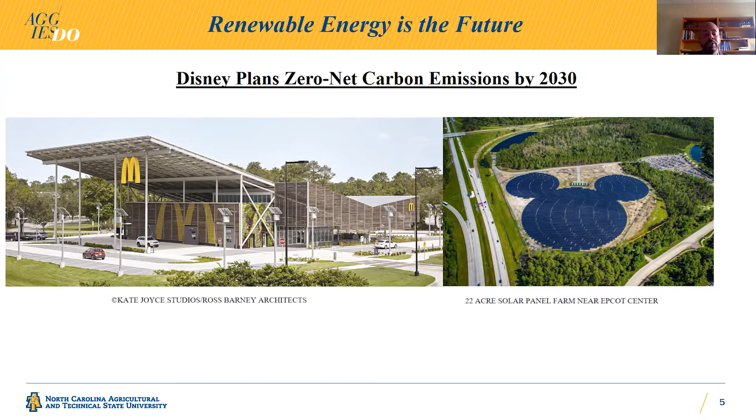And here is this, I just really like this picture. It's a solar power plant that's in the shape of, of course, Mickey Mouse, down in Disney World. So this is a global effort that's not just small scale. There are larger scale corporations that are interested in looking at renewable energy sources, okay? And so in engaging students, we wanted to explore what other types of energy sources we can use that are renewable forms.

And so they explored solar, they explored wind, geothermal, but they also explored ocean wave energy. And in that, we found out some very unique, interesting, and very promising characteristics about it.

And so now I'm going to pose my poll question to you, if you have that available. It's almost a rehash of what George had, so make sure you guys are paying attention here. Current estimates show that wave energy off the coast of the US can potentially meet blank percent of total US energy demand. Go ahead and put that in.

This is what I like to do to my students. I ask them a question that was almost already asked to see if everyone was paying attention. But I'll keep moving on, and we'll come back to it, and I'll give the answer in the next slide. All right. So it looks like we have a lot of people in 42. So moving to the next slide.

So the Department of Energy estimates that 2.64 trillion kilowatt hours, which is equivalent to more than 64% of all US electricity consumption, can be met by wave power just off the coast of the United States. And really, if we're able to combine all of the ocean energy resources in the whole world, it's more beneficial than wind and solar combined.

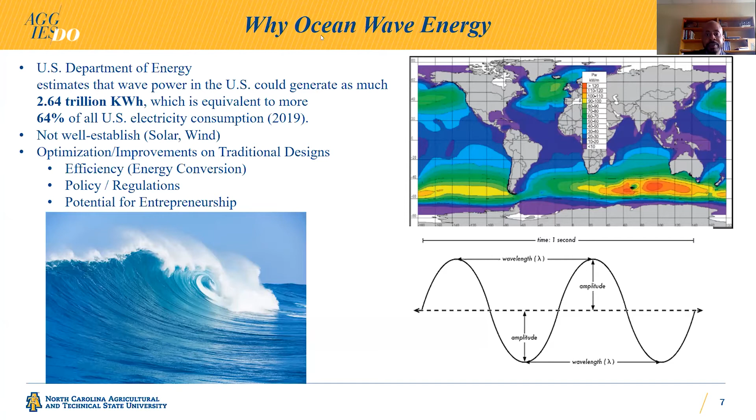One of the things that we do here at A&T is that we like to compete, and we also like to disseminate our research. And luckily for the North Carolina Renewable Ocean Energy Program, there's a yearly symposium in which students get to travel and network and interact with people such as Lindsay and George and Mike, and bounce ideas off of each other yearly. And the key point that really got a lot of students interested is it's in the Outer Banks of North Carolina. We get to spend a couple of days out there.

So we have female engineers, male engineers. We have graduate students mixed in with undergraduate students. We also have 3 international students. I have a student from Ghana, Bangladesh, and China. So when we came together and met throughout the course of the year, we were able to bounce a lot of great ideas, and different backgrounds and diverse thoughts were able to come in, and we were able to be very successful in that first year.

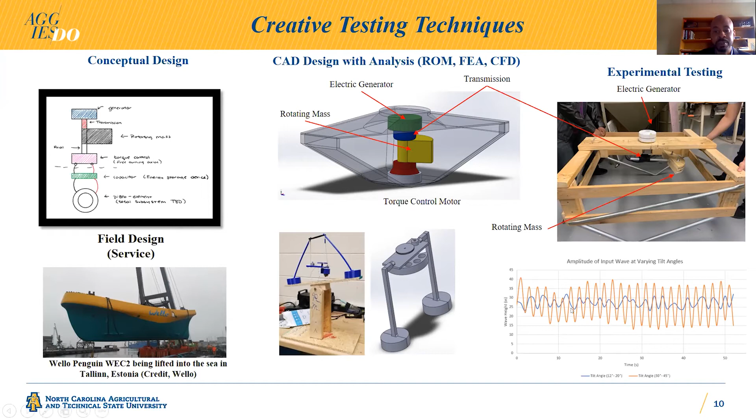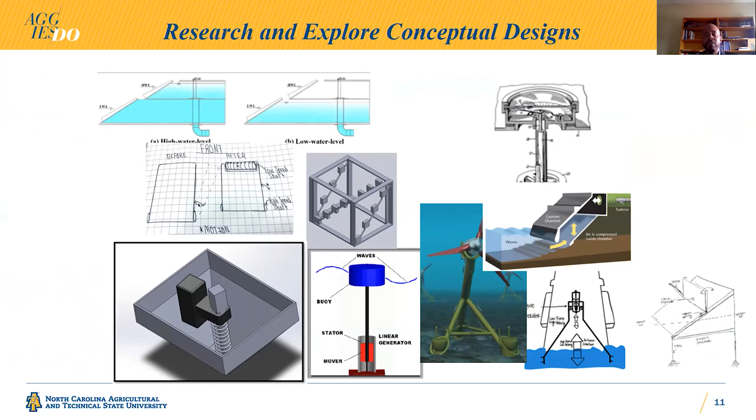So moving into the second year, and some of the successes that we had in that first year, the students wanted to explore all different types of ideas for ocean wave energy device building. So we looked at electromagnetic buoys, point absorbers. We looked at overtopping devices, even this device right here, which is a cascading waterfall effect in which gravity would generate kinetic energy from ocean water movement. We looked at underwater turbines. But finally, what we settled on is known as an oscillating water column.

So an oscillating water column acts by, as waves enter a chamber here, in which a pocket of air is centered just above the waves, it produces a piston-like motion as the waves come in and out. And that piston-like motion draws air into a turbine, which then spins and generates electricity.

Now, we chose this device for a number of reasons. One is that me being an aerospace engineer, I knew how to work with air and turbines, et cetera. Secondly, it's one of the most studied devices out there right now. So there's a lot of background information that we could use to draw ideas from, and that students could use to do their background lit search, as well as see if we can improve upon current designs.

The first thing that we saw when we looked at this design is, hey, from an aerodynamic standpoint, this chamber is very square-like. We have this sudden loss and change of area in terms of pressure loss that we could make more streamlined. So we saw a lot of opportunities to improve upon the current designs of oscillating water columns.

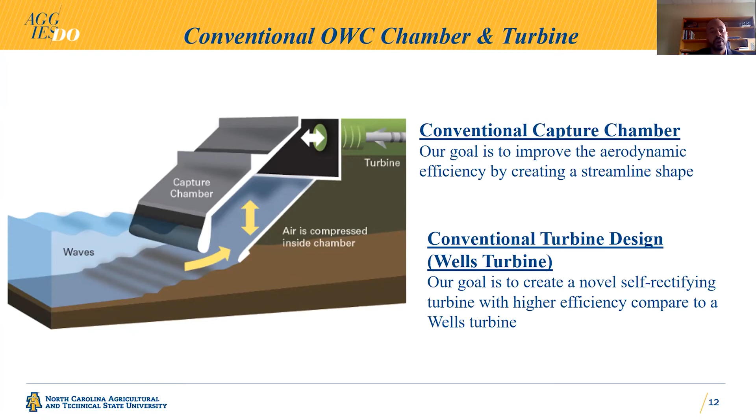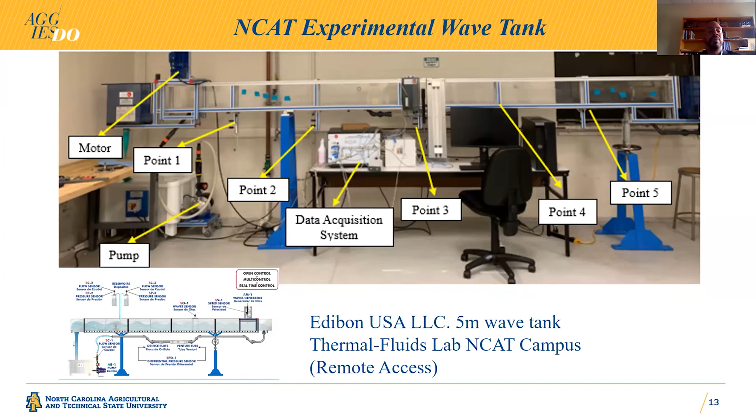Also, CSI, which is located on the coast of North Carolina, has this very large scale water tank that we didn't know of the first year, but luckily George introduced us to it when we went up there for the symposium and gave us a lot of free will to use this device at any time we needed it. So we were able to build even larger scale devices. So this is the second year team. We were able to build a large scale novel oscillating water column, as we like to call it, and test it in the CSI Wave Tank.

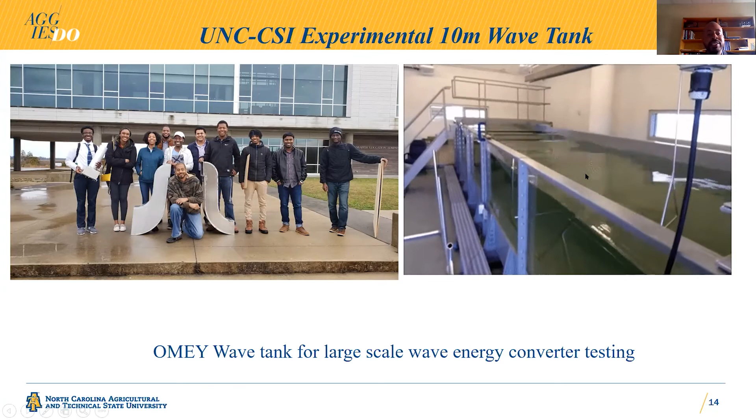And here you can see some pictures of that. So this is the oscillating water column. This is one of my favorite students, Murphy. And these are some of the students getting ready to test our oscillating water column in the CSI Wave Tank. For this first year, we had the chamber here. We had a turbine that's located inside of here. And we were actually able to show that once we turned it on, we were able to monitor the RPMs of the turbine using a tachometer.

This year, going into our third year, what we're moving to is actually connecting the generator to the turbine device, as well as a multimeter to see exactly how much electricity we're generating from our devices. So it's a progression each year to show continuous progress in terms of our research and development of oscillating water columns.

Just as a caveat, this test that we did was conducted last year around February 24th. So it was right before COVID hit, and we got in there the week before the whole university shut down. So we were very luckily able to get in there at that time and test.

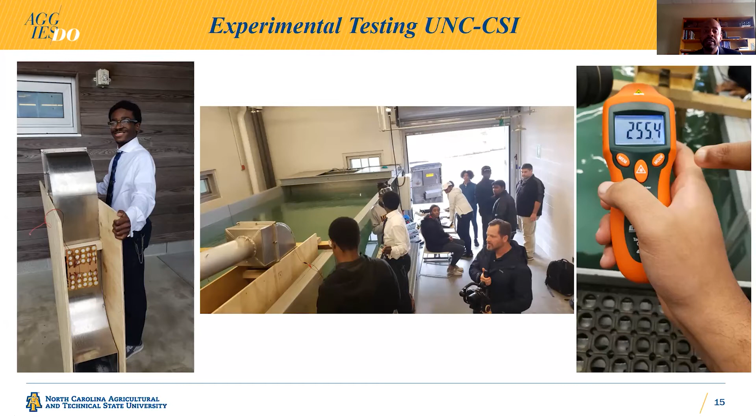Now, when the university shut down, we began to focus on using computational methods to assess our oscillating water columns. Doing things computationally, no one has to be together. We can log in remotely. So we were able to use a code known as ANSYS, which is a commercially available code, to test out different changes in geometry to do rapid assessment of these devices.

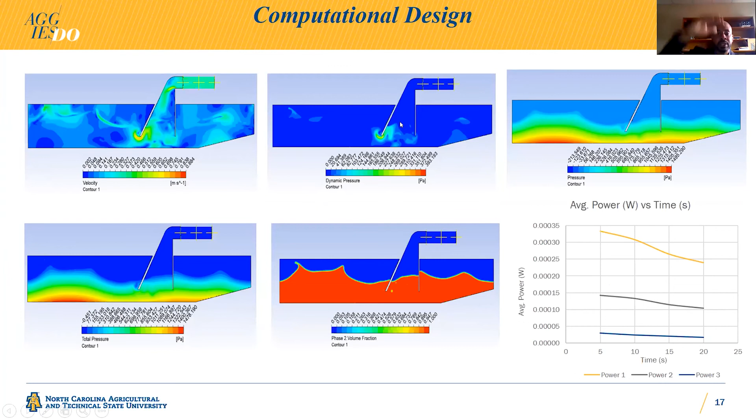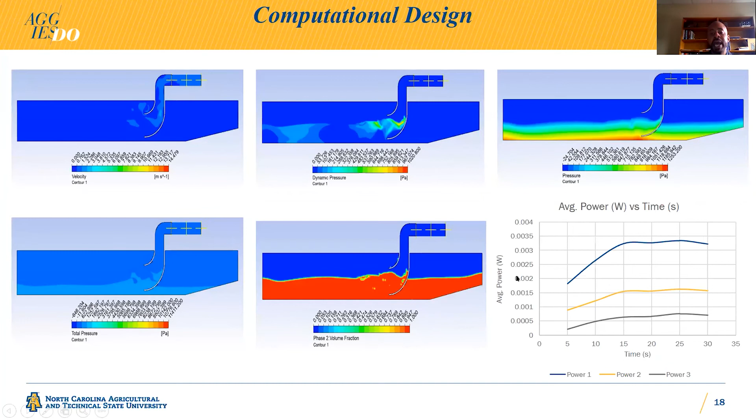So our first device, we started off with this kind of rectangular device, and we're able to measure, say, our average output versus time at different locations throughout the geometry. So what we would do is we would simply make small changes to the device. We would raise it, lower it, as well as make changes. Here you can see the kind of curved duct, or this more streamlined shape. We were able to actually produce an order of magnitude higher power compared to conventional designs.

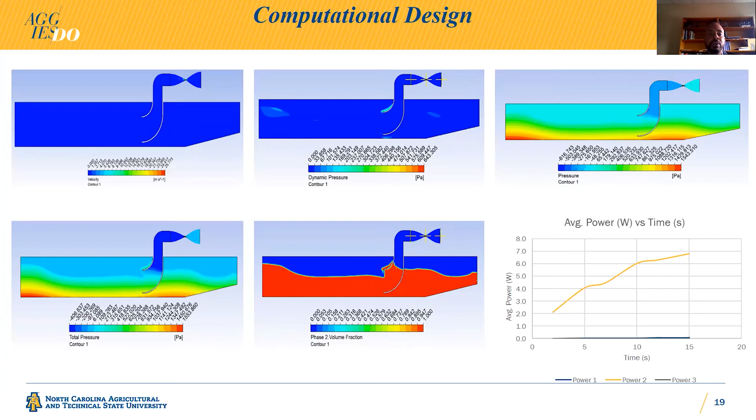And this kind of opens up a design space to us where we can explore many different ideas without having to deal with some of the COVID restrictions. So a lot of our efforts this year have been focused on computational design. Now that the university is beginning to open back up a little bit more, we're able to do more experimental testing, and hopefully we're able to get back to CSI and do large scale testing later on this semester.

A second piece of this, and where we plan on moving to in the future, is doing what's known as transdisciplinary education. So everyone's heard of multidisciplinary education, where we do mechanical, physics, electrical, computer science. But another piece that's missing, particularly when we start talking about ocean renewable energy, is that it's a global effort.

Last year, I teamed up with a tour group known as EF Tours, an educational tour group. We actually took a trip to Spain and Portugal for a week last year, and we were able to tour an oscillating water column facility located on the northern coast of Spain in the Basque region. And it's one of the very few oscillating water column facilities in the world. So being able to travel there and actually visualize it for students, I think was very beneficial for their education.

And not only do we want to incorporate engineering and the technical things, which most engineering students have a good handle of, we want to be able to begin to develop entrepreneurship collaboration. One of the things that we do at our university, and I'm trying to really pioneer this effort, is for our students to work with community makerspaces. Makerspaces are popping up throughout the country. This one in particular is located in downtown Greensboro.